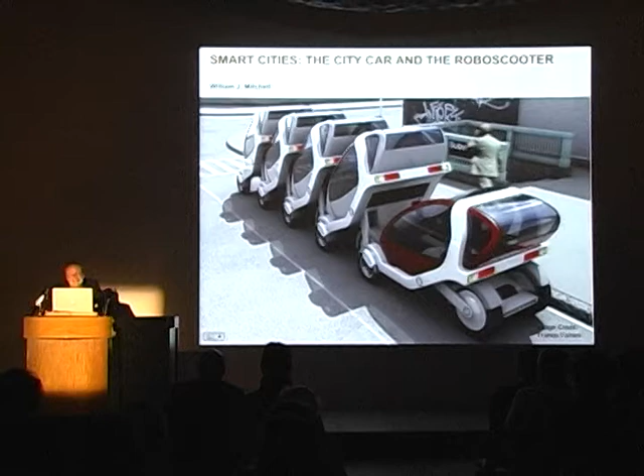I'm going to talk to you this evening about the recent work that we've been doing in my group at the MIT Media Lab. The Smart Cities group is a cross-disciplinary group that deals with really design problems that don't fit within the traditional disciplinary boundaries.

Roughly, they're architectural problems, I think. My roots absolutely are as an architect, but they cut across the boundaries of urban design, of software, of digital networking, and the various other kinds of technologies that I'll talk a little bit about as we go through this evening. We've been doing a variety of different projects, all of which have fairly high technology content.

I was quite thrilled this week. Time magazine put out their list of 50 inventions of the year, and two of them are ones that came out of my lab. I'll talk about one of them this evening, the CityCar project, and another one, the water pavilion, which I won't talk about, but you can take a look in the magazine and check that one out.

So the general direction we've been pursuing is to attack really what I take to be fundamental architectural and urban design and social problems using a repertoire of technologies that's perhaps not the usual repertoire of technologies. So the two projects I'll talk about this evening are the CityCar project, which is a project we've been doing in collaboration with General Motors for the last couple of years, and a project we call the RoboScooter, for a little electric motor scooter that was just introduced at the Milan Auto Show yesterday. So you'll see the first pictures, in fact, of the RoboScooter this evening.

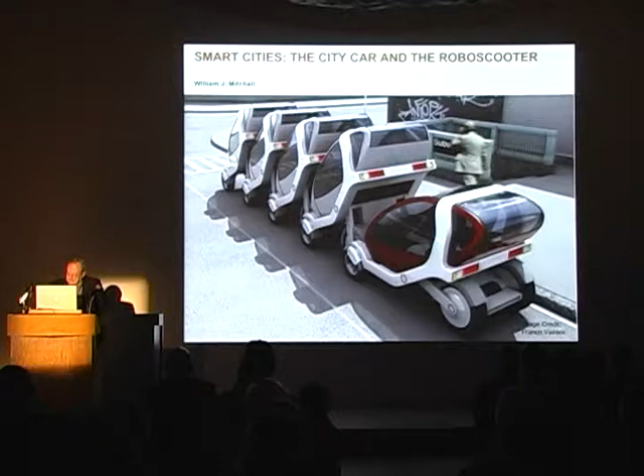And we got rid of all kinds of useless stuff that's in a traditional automobile. We got rid of engines. We got rid of the powertrain. We got rid of steering wheels. We got rid of a whole lot of stuff and reduced the thing back to its essentials as a mobility device, and made something that's very small and very simple and very light. This thing is the size of a smart car when it's unfolded, and when it's folded up it has half the footprint of a smart car. So that's the dimensions of this project, the basic outline of this project.

Let me just show you a couple of slides that suggest why this kind of project is important, why I think it's vital for architects and urban designers to really address this kind of issue in an innovative way. This is the century of the city. It's the century of urbanization. There's kind of a fashion towards the end of the 1990s to think that digital telecommunication and the death of distance that was anticipated at that point would maybe dissolve cities and kind of smear everything across the landscape in a non-urban kind of way. Of course, that never happened. That certainly was never something I expected to happen either.

In fact, we've moved into a century of very, very rapid urbanization. And as probably most of you know, in the 21st century, about 90% of population growth is going to be in urban areas. These urban areas of the world already account for more than 50% of the world's population. We reached that point about a year ago. It's going to move up to 60% pretty quickly. Not only will a lot of the population be in cities, but the huge concentration of wealth will be in cities also. Something like 80% of the wealth of the world will be in cities.

And so if you're concerned fundamentally about urban sustainability and sustainability of the globe generally, the pattern of future energy demand that is determined by urban networks is a really fundamental thing to look at. And if you look at this in a bit more detail, you rapidly see that transportation and building operations typically account for something like 60% of total urban energy use. And some of this is incredibly irrational. I looked at some figures a little while back that revealed that in Manhattan, at peak times, something like 40% of total gasoline use is in cars just driving around looking for parking.

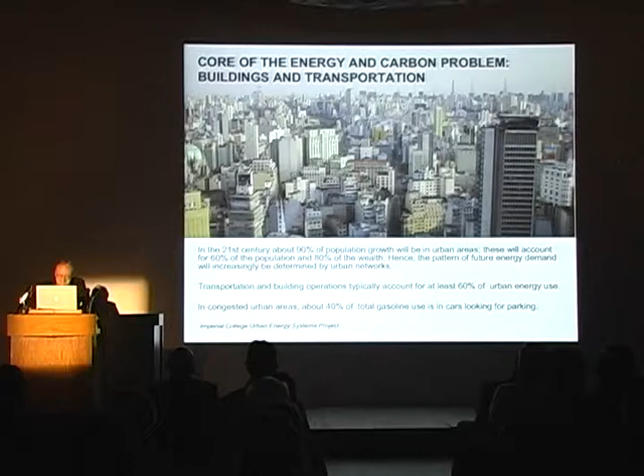Now, this is not rational. There has to be a better way to organize things than this. So this is a major, major issue. How do we deal with it?

Well, I'd like to suggest to you that incremental efficiency gains are not going to get us to where we need to be. Incremental efficiency gains, new gadgets, new fuels, new ways of dealing with things that gain little increments of efficiency are certainly important and worth pursuing, but they're not going to suffice to make a big dent, the sort of big dent that we need in overall urban energy usage.

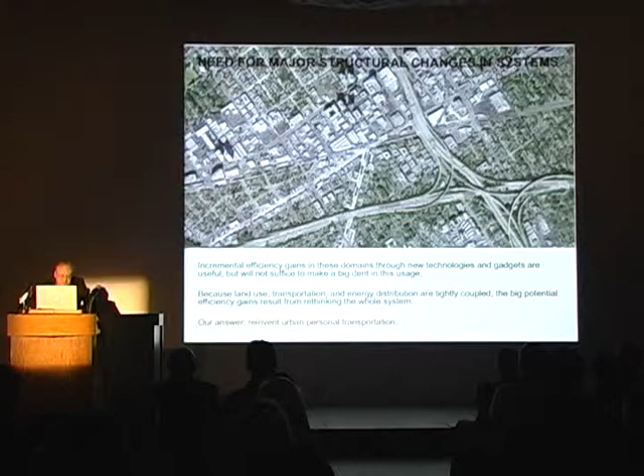Furthermore, as I think most of you realize very well, land use, transportation, and energy distribution systems are very, very tightly coupled. You really can't change one without changing the others. So the big potential efficiency gains result from rethinking the whole system. And that's really what we've been about. We've been looking at ways to fundamentally reinvent urban personal transportation.

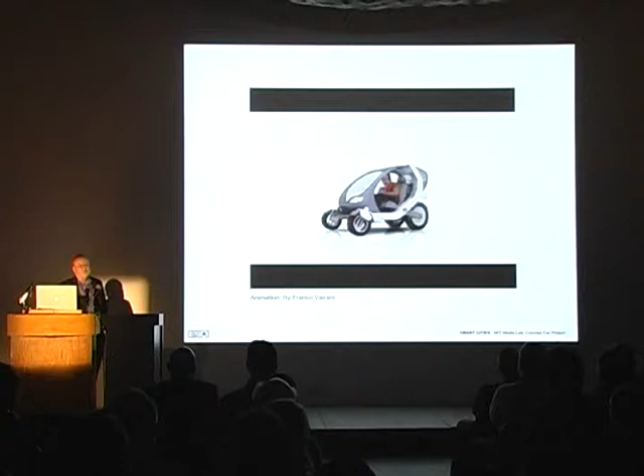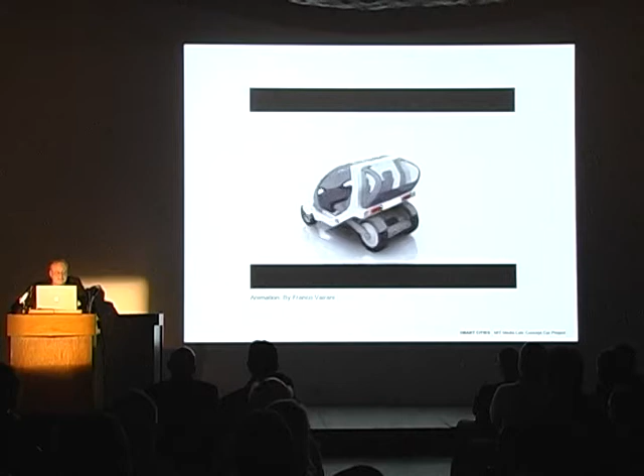This is an early animation we did to show the basic concept of the CityCar. These things do have doors. It was just when we did this, we didn't know what the doors were going to look like, so we didn't put them in. But here we see the basic model of the CityCar. It's a one-way rental system, a one-way shared use rental system. So you pick up a CityCar from a stack, you drive it to wherever you need to drive it, and then you just drop it off.

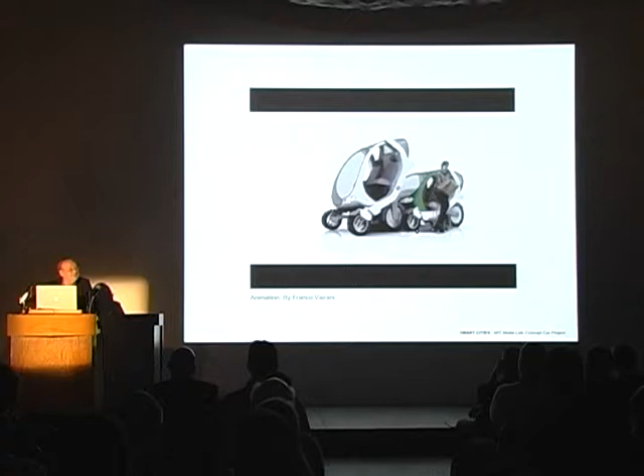The cars recharge while they're in the stack. They're like your electric toothbrush. Through inductive charging, they just automatically recharge. Because they automatically recharge, you never have to plug them in, you never think about filling them with gas. The thing just runs. It automatically sucks up the energy that it needs.

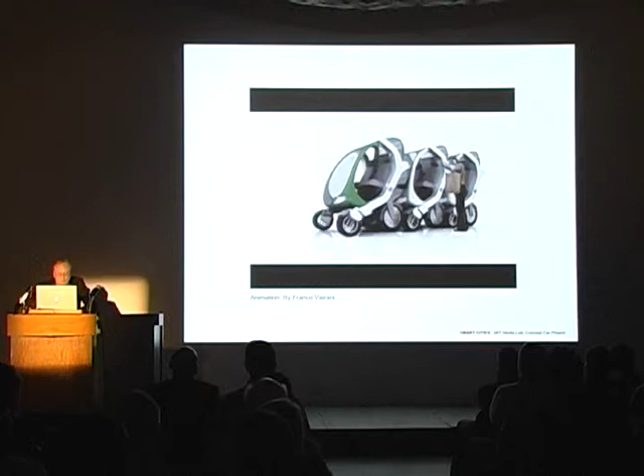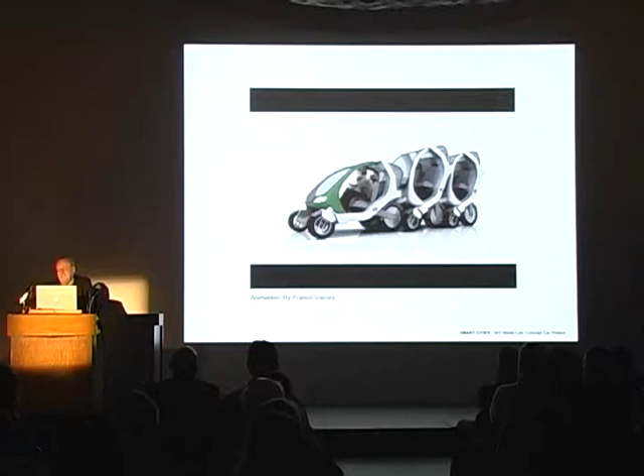And furthermore, because of this one-way rental model, which basically comes down to fairly short trips between charging stations, you don't have to carry around a large number of batteries, and you don't have to give the thing a very long range. So you overcome the fundamental Achilles heel of all pure electric vehicles, the deficiencies in battery technology.

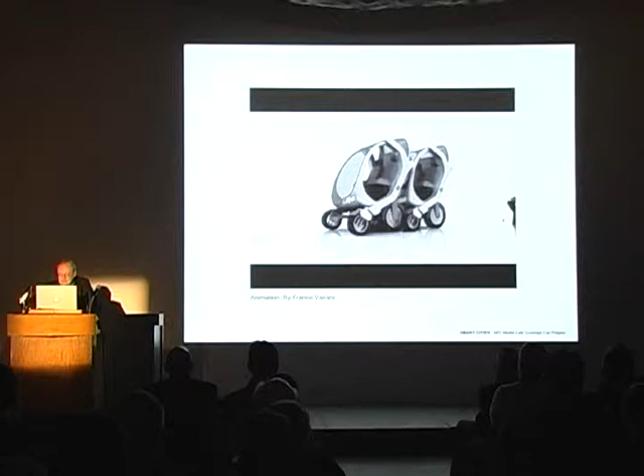So here we see the students just demonstrating how they made the animation, just to make sure you understand these things are not quite real. They weren't anyway at the point we did this. So what are the principles? What are the principles of this thing? Well, as I've said, they're shared use two-passenger electric cars that fold and stack like shopping carts.

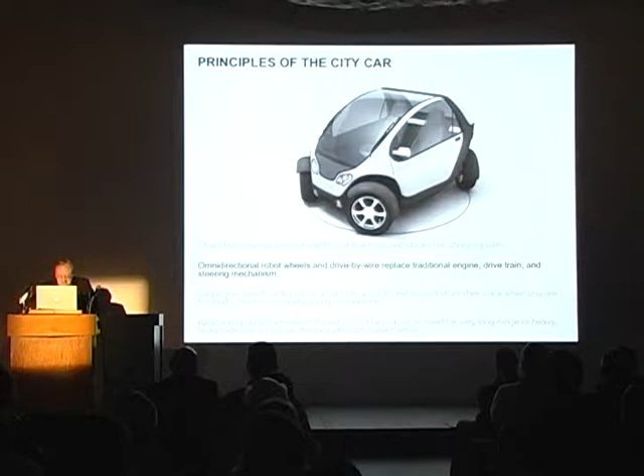They have robot wheels. Basically, we've taken everything of the fundamental mechanics of an automobile and stuffed it all in the wheels. So drive motors in the wheels. This is a very feasible thing to do now. You can get very small, very efficient, high-torque electric motors that will fit very nicely within automobile wheels.

Secondly, we put suspension in the wheels. In-wheel motors don't really work very well unless you put suspension in there too. Otherwise you get lots of unsprung mass and very poor performance, very poor handling. So we put suspension in the wheels. We figured out some ways of getting the suspension in there. Steering is in the wheels, and braking is in the wheels as well.

The wheels have a simple snap-on mechanical connection to the body. It's a little bit like snapping a bayonet mount lens onto a camera body, and it's a simple mechanical connection, and it carries electrical and data as well. It's all drive-by-wire, basically. There's no mechanical connections between the controls and the wheels, just a data cable and a signal going in.

And these wheels spin at 180 degrees, so you can do all sorts of interesting maneuvers with this thing. They're all independently controlled, so you can do this, for example. You can spin the car on its own axis, so you don't ever have to do U-turns. We do O-turns, as we like to say, instead of U-turns. We just change the alphabet a little.

If you want to parallel park, it's really easy. You just drive up like this and then go in sideways, spin the wheels around and go in sideways. Part of our ambition on this is to eliminate everything that might be difficult on a driving test, to make everything so easy that just anybody can get in the car and drive.

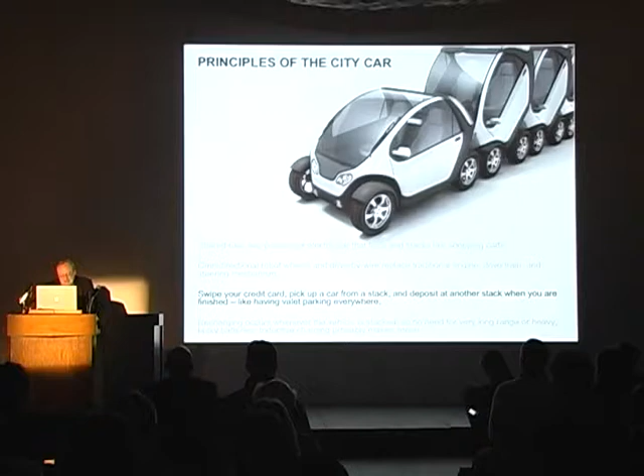The basic model is that you have lots of stacks of these cars around the city. You swipe your credit card, pick up a car from a stack and deposit it in another stack when you're finished. It's like having valet parking everywhere.

Now, everybody used to tell us that this sort of one-way rental model was hopelessly utopian, that it could never work, people wouldn't accept it, that you couldn't figure out all of the technical details. We have an existence proof now that this sort of system does work.

If you have been in Paris in the last few months, you will have seen that 10,000 rental bicycles have been put on the streets in Paris, and they operate on exactly the same kind of system that we've developed here for the CityCar. There are stacks of bicycles all around Paris now. You swipe an access card to unhook a bicycle from a stack. You ride it to wherever you want to get off and just leave it at that stack.

The system is so efficient that it's able to be provided free for the first half hour, which has already motivated all the kids in Paris to figure out ways to drive stack to stack in 29-minute increments across Paris, which is terrific and part of the model.

And the thing really does self-organize. Very, very few bicycles end up in the wrong places. You do a little bit of adjustment of the system to keep the thing tuned properly, but basically it is self-organizing. So this is also a self-organizing one-way system, and it will be very cheap.

And as I've said, recharging occurs whenever the vehicle's stacked, so you don't need long range or heavy bulky batteries, and inductive charging is the way to do this. And we've been doing quite a bit of work recently on the physics of inductive charging and ways to make this work. If you don't know about inductive charging, it's the way your electric toothbrush works, and it's the way that inductive cooking tops work.

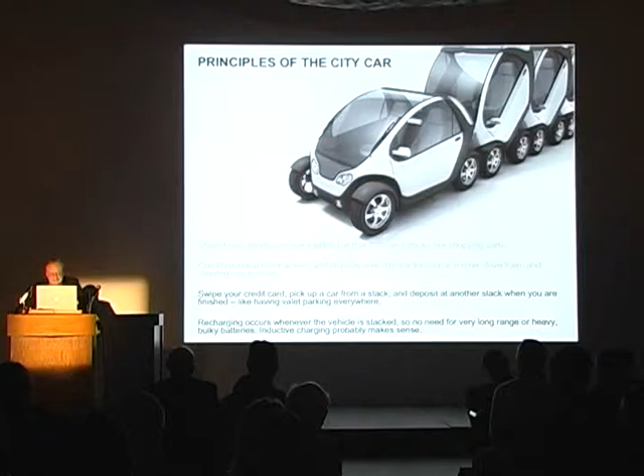So basically you have a couple of coils, and they transfer energy through the air. And then there are a lot of tricks you can perform with these things, with magnetic resonance and all sorts of clever things that I've just begun to figure out recently, and it means that you can do it without vaporizing people, without frying their pacemakers and all of those sorts of unfortunate effects. It really works quite nicely. So the idea is you'd build the inductive charging in the parking spaces.

This kind of vehicle architecture enables us fundamentally to rethink manufacturing. We end up with lightweight, strictly modular construction. You don't need large automobile factories to do this kind of thing. You don't need a lot of robots. You don't need big, complicated assembly lines. Standard interfaces between modules, very much like personal computers. We learned a lot from the personal computer industry. No heavy assembly, snap-together construction, sort of like Lego blocks.

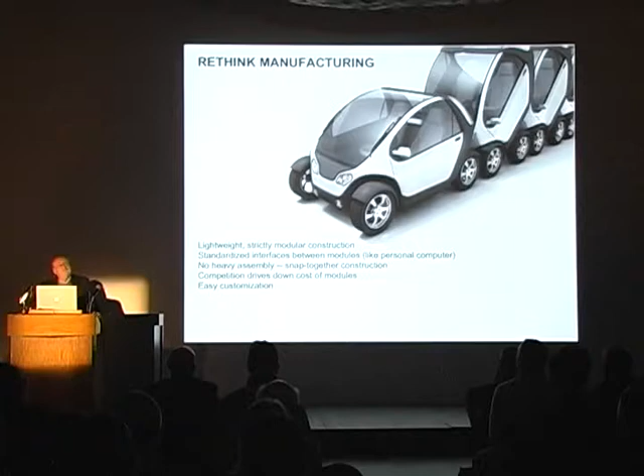And because of the standardized interfaces, we can anticipate that competition will drive down the price of the modules, particularly the wheel modules. So we expect this to be very much like disk drives of personal computers, which are actually very complicated things, but because of competition, they're very, very cheap these days. Over a period of 20 years, the cost has been driven enormously down, and you can easily customize these things. So that's the strategy. Here's one of our early prototypes of the robot wheel.

You might be interested to know that to do this prototype, we used some of the techniques that I've noticed just walking around this evening are very common around here. The basic stuff in here is actually just laser cut wood. Now, when you do a prototype that way, it doesn't last very long, but it's very quick and very cheap, and it's a way to figure out whether the fundamental mechanical principles work or not.

And the other technique that we used here, which is very, very powerful now, is to use eBay as a global parts bin. So if you want any kind of weird part, you just go and look on eBay, and almost certainly you'll find it there, and you just buy it, and somebody ships it to you by Federal Express, and it's great. So there are all sorts of little parts in here that we bought on eBay.

So what you see here is you can see the drive motor in there. You can see the suspension. There's a little suspension spring, which does have enough suspension travel, incidentally, to do what it needs to do. This one has brake discs, as you can see back there. The more recent ones don't have brake discs because we did some work with Ferrari, and working with the Ferrari engineers, we figured out that you can use these motors as very efficient brakes.

So you get rid of the brake discs and get rid of a whole system, and that also fits in with a strategy of using the motors as power generators, the kind of strategy that gets used on hybrid cars, regenerative braking. So this is one of the early prototypes. It works very nicely. It's not by any means as light and simple and elegant as we were aiming for. So we've continued to evolve this technology.

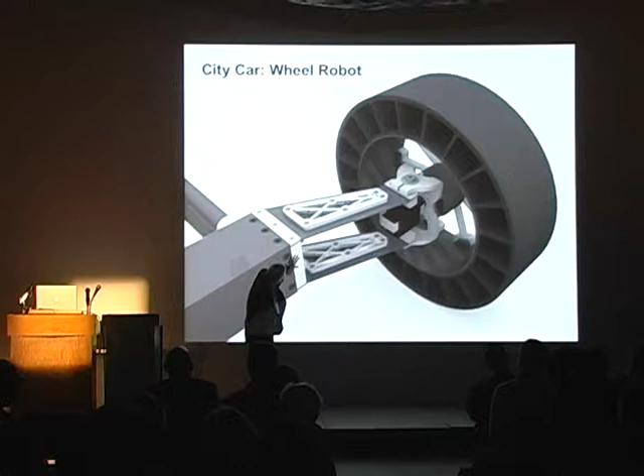You can see that the stuff in the wheel has become a whole lot simpler. We got rid of the brake discs. It's a whole lot simpler and more elegant. And on this one we have an airless tyre as well. So you use a polymer tyre that is organised so that it has the sort of resilience and structural properties that you want. And this attends to one of the ambitions I have for this thing, which is to get rid of all gases and fluids out of this thing. No gasoline, no oil, no water, no brake fluid, none of these things, and to make the whole thing basically a robotic electronic device.

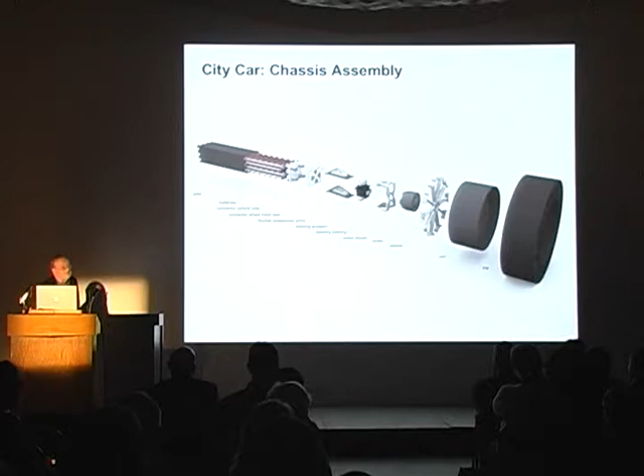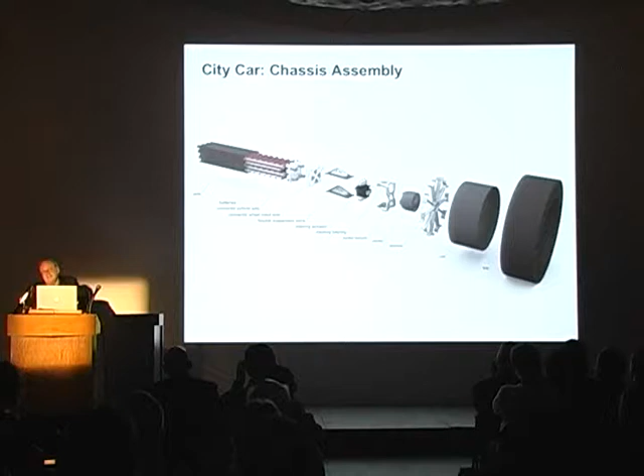So here's how this one goes together. These are just an exploded view showing the pieces. It's actually remarkably simple in the end. And this is one of the principles that we've been looking at, a principle that's introduced in Swatch watches, for example, of trying to make radical simplifications of the system. So you reduce the part count and radically reduce the cost. So these are the pieces. You see the snap-on connection there. And in this case, the batteries go in the axle. So we use A123 batteries, a new kind of battery that are very efficient and have very, very nice properties. And so this is the basic assembly.

Here's a half-scale prototype of this thing. And the thing I want you to notice here is that there's almost nothing there, which is absolutely the point. I mean, a traditional automobile is a very, very complex thing. Lots of parts, lots of stuff, lots of metal. This is almost nothing. So we have the 4 independent robot wheels, which provide drive, steering, suspension, everything you want. The batteries are in the axle there. And here's the digital control system. It's entirely digital and relatively simple circuitry to drive the thing.

Not so simple software, I should say, because you've got 4 independent wheels that can all steer independently and can all have independent speeds and independent amount of power going to them and so on. So very interesting control system problem and very, very interesting thing to design for the kind of maneuverability properties you want. A couple of other consequences of this strategy are that most of the driving characteristics of the vehicle are embodied in software rather than hardware. This means you can download them like ringtones on a cell phone.

So if you're a 17-year-old with a death wish, you can make it perform like a sports car. If you're my 90-year-old mother who has slow reaction times and wants to drive very stably to the supermarket whenever she wants, then it can adjust to her driving characteristics. So this is a very, very important piece of design freedom that you get by replacing hardware with software. I think this is a very important general principle, incidentally. Also, software weighs nothing, whereas hardware always weighs something, so you get great weight advantages by replacing hardware with software.

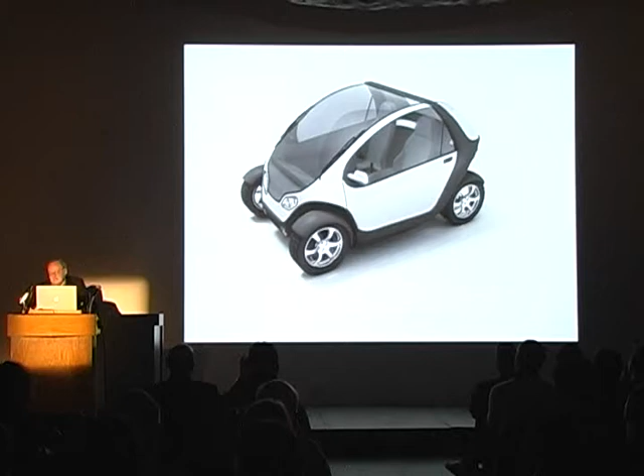So the wheels, the folding chassis, and you can just see how it snaps together in modular fashion. And this is another version. We have many versions of this thing, but this is another version of the automobile. All right, so what do we get out of making a vehicle like this? Well, we get 3 kinds of energy and sustainability efficiencies, and I'm going to take them one by one and explain them to you, beginning with the most obvious one, probably the least important one, and then moving on to some less obvious ones that I think are probably more important.

So the obvious one, I'll call the first order efficiencies, very tiny footprint. As I said before, size of a smart car when it's extended, half the size of a smart car when it's folded, and with the headroom and legroom of a 3 Series BMW, and because we get rid of a lot of stuff, we can do this. Much more agile than a traditional car, so it makes much more efficient use of urban infrastructure.

Secondly, it does all of the things that you want from a benign urban vehicle. It's lightweight, it's all electric, it's digitally controlled, it's almost silent, and there are absolutely no tailpipe emissions. And the shared use principle does something very interesting for you. It enables very high utilization rate.

Traditional automobiles spend about 80% of their time parked, completely useless, burning up space, burning up embodied energy, costing you money. You just have to step out into the parking lot outside here to see what I mean. It's doing absolutely nothing except consuming resources. If you move to a shared use principle, you're able to flip it around and you get about an 80% utilization rate. In other words, the cars are in use about 80% of the time. So you get the same amount of mobility in cities with far fewer vehicles on the road. So this is a very important plus if you want to reduce urban congestion.

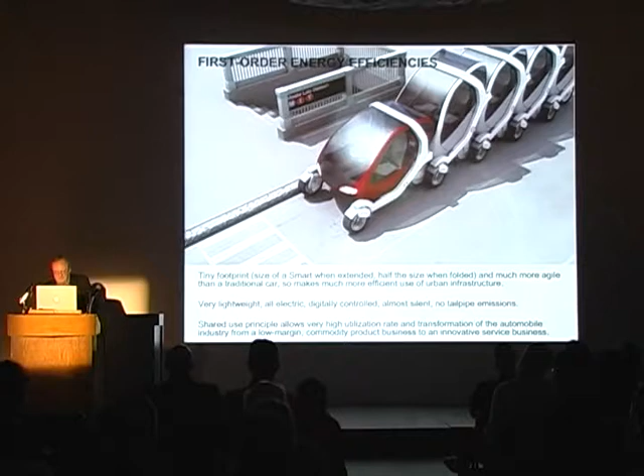So these are the first order energy efficiencies, essentially much smaller cars, much more benign cars, far fewer of them on the road in order to provide the sort of personal mobility that we want to have in cities.

If you were foolish enough to stack as many of our cars as you possibly could around a block, you'd get more than 500 cars around the block. So you get a compression ratio of something like 6 to 1, more than 6 to 1 here. This is enough, as the urban designers here will recognize, to fundamentally change the basic relationship in a city between the space that's devoted to automobiles and the space that's devoted to productive and humane human occupancy. And this is the kind of big win that we're looking for in pursuing this.

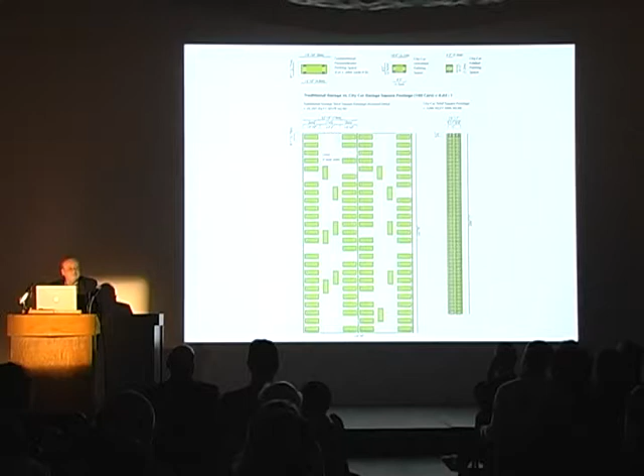And there are some very interesting models for doing these sorts of things. For example, you can put a vertical stack in a parking building, in an apartment building. So it's sort of like a Pez dispenser, so that whenever you come out the front door of your apartment building, there's always an automobile sitting there waiting for you to drive away. And you just drop it back in the other end of the stack when you come back. So you start to see the kinds of models and the way it begins to affect not only overall urban land use, but also opens up some very interesting possibilities for building form.

Let's just take it up to another level. Okay, so that's the first order efficiencies. Second order energy efficiencies are less obvious and probably more significant in the long run. This has to do with the structure of urban energy supply systems. And I pointed out that you really have to think of transportation, land use, and energy supply as all being part of the same system.

So a big problem with electrical systems, with electrical grids, is they have no storage capacity. So this means if you get a spike in power demand, for example, as happens on a really hot day in Los Angeles, the only way to handle that is to have backup capacity power plants somewhere that you then throw online, and having that excess capacity is very expensive. Or else you do brownouts and cut people's service. So neither one of these things is a satisfactory response. So spiking in demand is a major, major problem for power grids.

Now, the other problem with power grids having no storage is it makes them very unfriendly to clean, intermittent power sources like solar and like wind, because the sun doesn't necessarily shine when you want the energy, and the wind doesn't necessarily blow when you want the energy. So unless you have storage capacity somewhere, you have to have backup generation capacity to back up the solar and back up the wind and so on, and that makes it all extremely expensive and uneconomical.

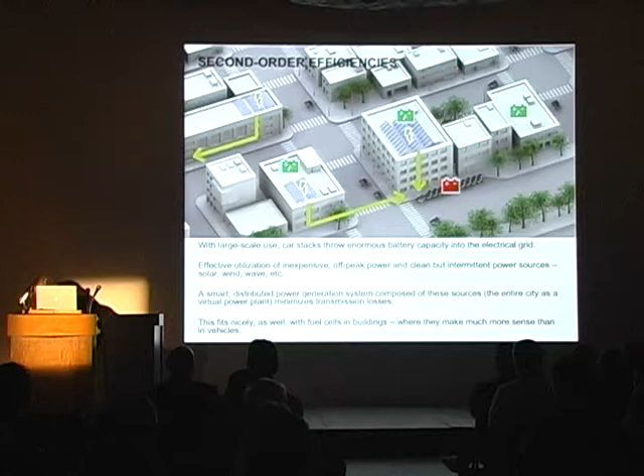You just dropped a water bottle, sorry.

Then you sell electricity back to the grid. So this evens out the power spiking, and it makes the whole thing much, much more friendly to clean, sustainable power sources. Also, it opens up the possibility of really starting to think of a city as a smart distributed power generation system composed of sustainable sources. So it starts to be much more economical to put solar panels on the roofs of buildings, for example. It starts to be much more economical to bring wind power into the system.

And since you're charging these cars in close proximity to where the electricity is actually generated under this kind of system, you minimize transmission losses, which are an enormous problem with the traditional organization of power grids. Also, if you want to use cogeneration plants, if you're interested in fuel cells, all of these kinds of strategies make a lot of sense with this kind of strategy.

And it makes a lot more sense, incidentally, if you're interested in hydrogen fuel cells, for example, to put them in buildings and charge up the automobiles, charge up the batteries, rather than carry the fuel cells around in automobiles. That's a lot of weight. You're basically carrying a big chemical plant around in an automobile, and it's also highly explosive. Doing our calculations on this, we measured the capacity of these things in hand grenades, which we thought was a dramatic unit to illustrate the explosive capacity of this.

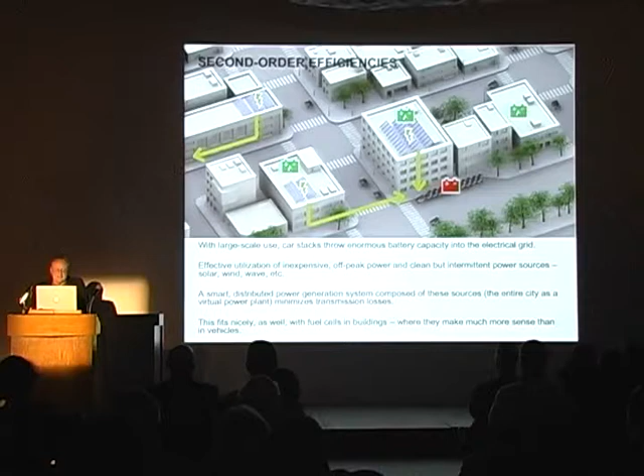So the second order energy efficiency then is to restructure in a fundamental way urban energy systems, and to make sustainable, clean energy a much more attractive proposition. We've done a lot in looking at this kind of thing too, where you start to interconnect different kinds of systems in order to get efficiency. This is actually some work from some colleagues in Imperial College in London. This is not our work, but we're very interested in it, which shows, for example, how you can interconnect the natural gas system, the water system, and the electrical system so that you take maximum advantage of the different kinds of

resource streams. So, for example, a traditional water system has pressure-reducing valves to take the high pressure water that comes from a reservoir and break it down to a pressure that doesn't blow your appliances off the walls and so on. Well, instead of doing that, you put a micro turbine in there and generate electricity out of the reduction of water pressure. And then the gas turbine can run in a cogeneration mode where it generates both heat and electricity, and you can begin to see how you can start to make all of these things fit together in a very powerful way.

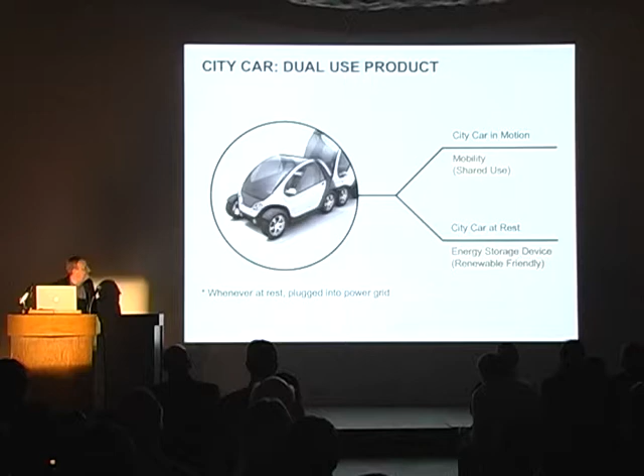So instead of thinking of a city as a collection of different systems superimposed, a water system, electrical system, a gas system, and so on, start thinking of them all interconnected intelligently, forming the intelligent metabolism of a city. All right, this just then illustrates this concept that basically this car is a dual-use device. So when it's in motion, it provides mobility. When it's at rest, it provides the energy storage device that transforms the character of the power grid.

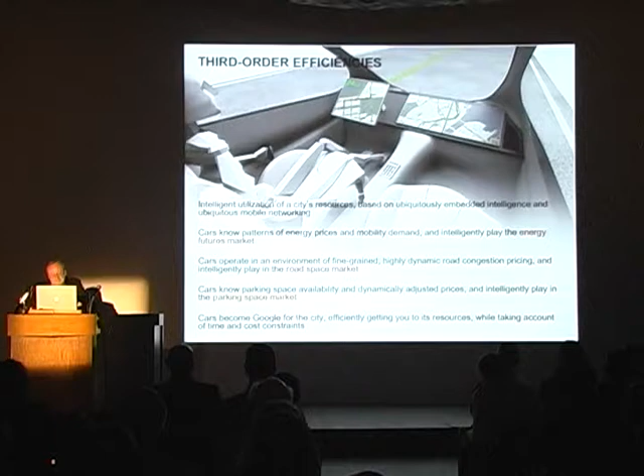All right, the third order efficiencies, and maybe these are the most significant of all. Basically, we think of this device as not simply a device for moving things around, but a device for intelligent utilization of a city's resources based on ubiquitously embedded intelligence and ubiquitous mobile networking. So these vehicles are conceived of from the beginning essentially as networked computers on wheels. We think of the dashboard as being not an interface to the engine, which is a very 19th century idea, but as an interface to the city. And so you end up developing the idea of a map-based interface and a navigational interface in a much more sophisticated way than has been done so far. This is a very crude early conception of this, but you start to get the idea.

And this intelligent access to the city's resources involves the automobile intelligently navigating simultaneously three kinds of markets. So, as I've already described to you, these cars know patterns of energy prices and mobility demand, so they intelligently play the energy futures market. They also play a road space market. So how does this work? Well, the basic idea here is you do traffic congestion monitoring on a block-by-block basis in real time, and that's a very feasible technology these days. You do congestion pricing, and you adjust the prices in real time based on the density of traffic at particular locations. So basically, the more traffic going down a road, the more it's going to cost you to add your automobile to that road.

This idea of congestion pricing is gaining some traction. Singapore has been doing it for a while. London introduced a congestion ring a couple of years ago. Mayor Bloomberg in New York is trying to do this. We're going to see much more of this kind of thing. But what we're proposing here, and we've developed quite a bit of software for this, is something much more sophisticated. So basically, when you set things up this way, your car navigation system is able to do things like take me the quickest way to my destination subject to a price constraint. I don't want to pay more than $10 or something like this. Or the other way around, take me the cheapest way to my destination subject to a time constraint.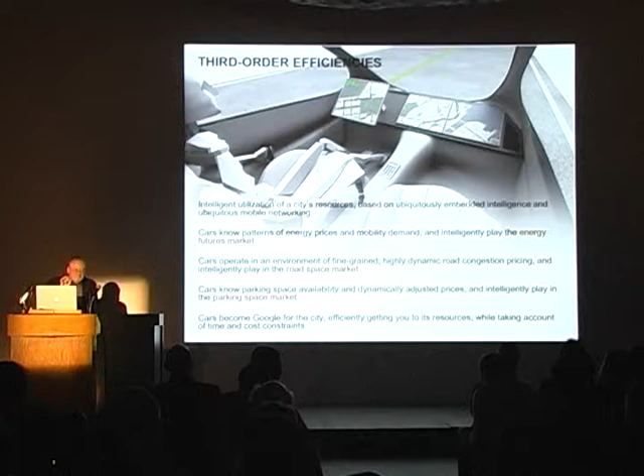So you get a road space market going in which the behavior of these intelligent agents responds to the overall pricing in the system in real time, and the overall pricing in the system responds to the behavior of the agents in real time. So you get a real-time feedback loop going, a classic kind of economic system, and as far as I can tell, though we haven't done all of the math on this, this comes to a very nice equilibrium and beautifully allocates demand to the capacity in the road system. So that's the road space market. A similar thing with parking. Imagine a parking, well, firstly, parking is a terrible market.

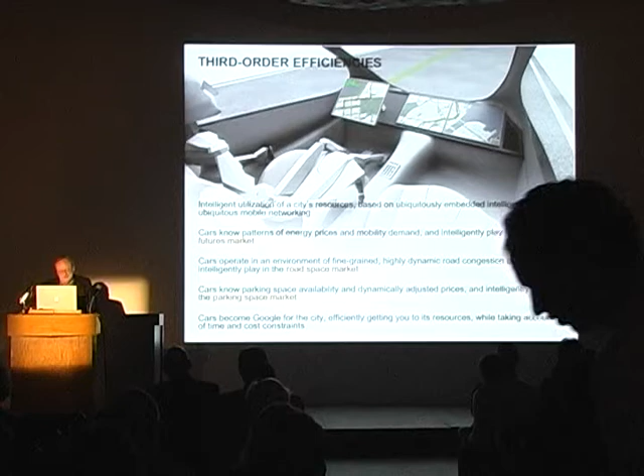Essentially, it has fixed prices, rigid fixed prices, and you connect buyers to sellers by driving around randomly till you find a parking space. So this is really not very good. Furthermore, parking is very, very underpriced in most cities, as my old UCLA colleague Don Shoup, very good economist, has demonstrated. So how do we change this?

Well, put sensors in parking spaces and get the information about parking spaces back to the navigation systems of automobiles, and enable the automobiles to do eBay-style auctions on parking spaces. So basically you can say, look, I'm really desperate right now. I have to find a parking space. I'll pay just about anything. So your car bids high and gets you an expensive but very convenient parking space.

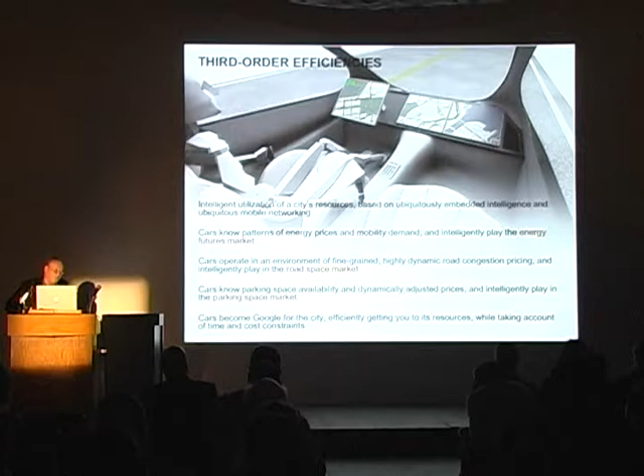Or else you say, I'm a poor student. It's a nice day and I have a little bit of time. I want to save some money. So bid low and probably I'll get a parking space. It's a little bit further away, a little bit less convenient, but it's going to cost me a whole lot less. So essentially these cars become Google for the city, efficiently getting you to the resources of the city while taking account of time and cost constraints.

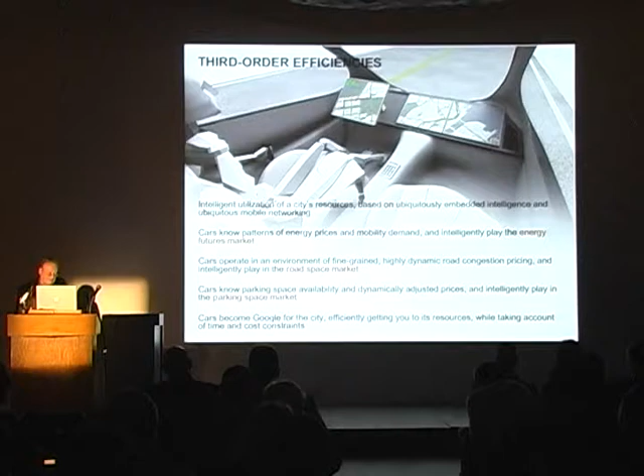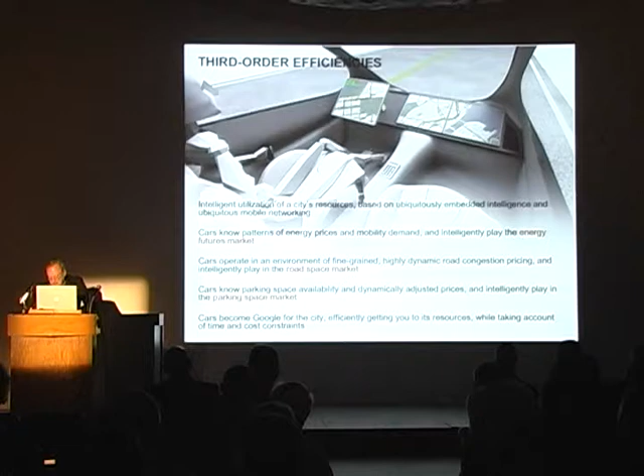So energy cost by playing the energy market, road space by doing the kind of dynamic road space market that I just described, and parking space. So take these third order efficiencies and you end up having a city that works in a much, much more intelligent way. So I just want to show you one more thing about the car, then I'm going to show you another recent project we've done, the RoboScooter project. So there are a number of different ways to organize these systems at an urban scale.

This diagram, by the way, shows the control system of the car. So there is no steering wheel. There's basically a double-sided joystick that you drive like this. It comes up on either side of your seat. And you only need to know three things to drive this car: push to accelerate, pull to brake, and go like this to drive. There are no pedals, there are no other controls, there's no key to stick in, none of this sort of 19th century stuff. It all gets reduced away to something very, very simple indeed.

We built a simulator for this and put it in the MIT Museum and connected it up to an incredibly un-PC video game that involves driving through downtown LA, actually. And it's the most popular exhibit in the MIT Museum. The kids have enormous fun driving this interface. But anyway, the ways in which you can organize these sorts of car systems. So here are some models.

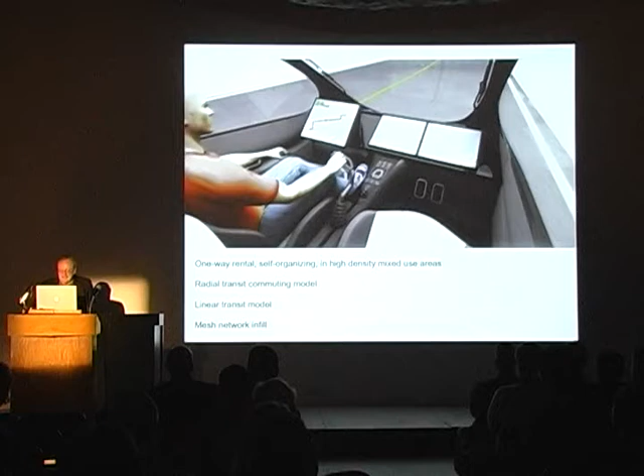So another way to organize these city car systems is to place stacks of these on transit stops, so they solve the last 10-kilometer problem. So the model here would be you come home from work, you pick up a car at the transit stop, you drive it around in the evening, you let it recharge at home overnight, and you bring it back to the transit stop the next morning.

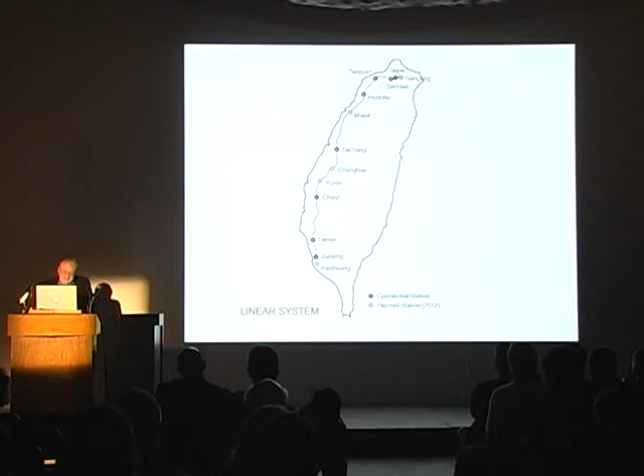Here's another way to do it, a linear system. This is something we've been proposing in Taiwan, and potentially very interesting. So Taiwan just put in a high-speed rail system that goes in completely linear fashion from one end of the island to the other at incredibly high speed.

This thing goes as fast as a Formula One car. So the model here is simply to put city car stacks on the high-speed rail stops, so they deal with the detailed destination problem, the last 10-kilometer problem.

So you might go, for example, if you wanted to take a trip from Kaohsiung down in the south up to Hsinchu up in the north, you'd drive your little city car to the railway station at Kaohsiung, leave it there, blast at very high speed to Hsinchu, and then pick up another one at the Hsinchu station and drive that to your detailed destination, and then drive it back probably to the Hsinchu station when you'd finished with it.

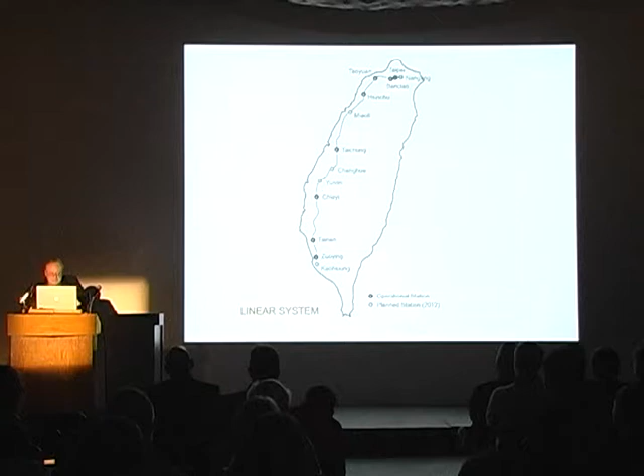This is another electric vehicle we've just done. We did this one for Sanyang Corporation in Taipei, and literally just yesterday we introduced the prototype of this at the Milan Auto Show, the Milan Motorbike Show. So this is very similar principles to the car. It's a folding, stacking vehicle with robot wheels.

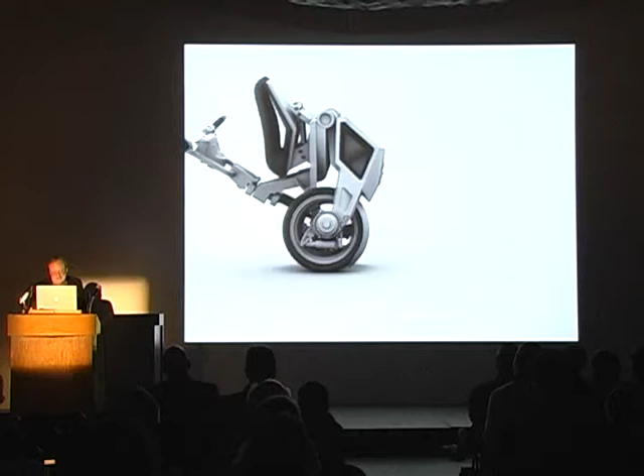It's a two-wheel drive bike, which is very difficult to do with traditional technology. So it has two robot wheels, as you see here, and it folds up. This is a little exercise in transformer design, basically. So that's the way it folds. Whole bunch of patents on the way this folds, by the way.

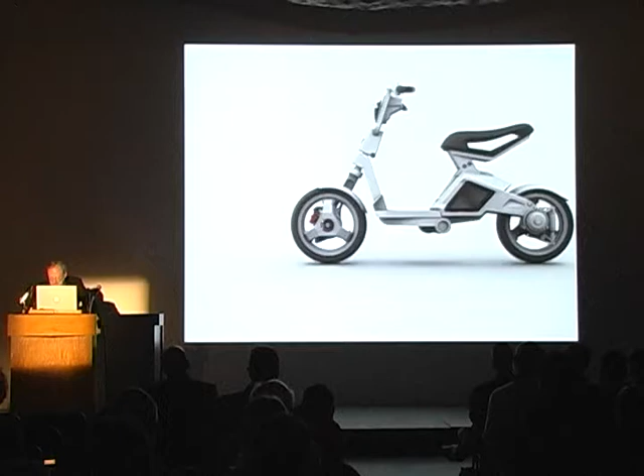The basic model for this is it has bike racks where it recharges in the bike rack, and has a removable battery pack under the seat there. And there are a bunch of other things that I'll describe as we show the actual thing. So these are the final CAD models of the thing. One of the things that I wanted to do was radically simplify motor scooters in order to make them very inexpensive for big Asian cities.

So a traditional motor scooter, a Vespa or something like that, has about 1,500 parts. We were able to get this down to 150 parts, so it's a factor of 10 reduction in the number of parts. We did that in two ways, by using the robot wheel principle. That gives us enormous simplification, and by getting rid of all of the sheet metal and plastic and all of that stuff that sort of messes up traditional scooters.

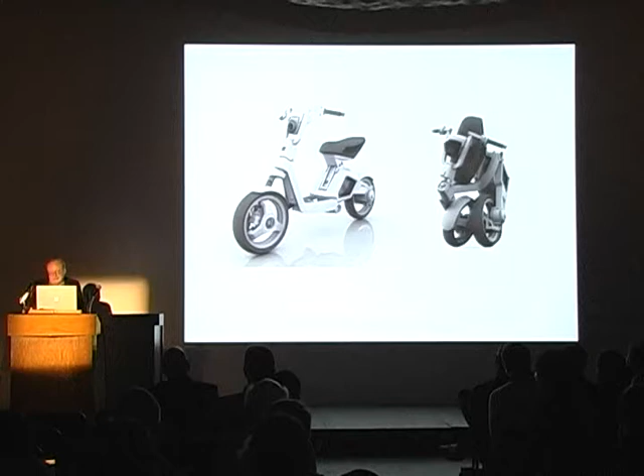And it's a structurally optimized cast aluminum frame, so everything you see here is just the frame exposed, the cast aluminum. And because it's electrical and just has the robot wheels, we were able to get the weight and the complexity way down. This is the actual scooter. This is the finished scooter. You can see a couple of things about it. The two robot wheels here, rear.

It's asymmetrical. The drive motor is on one side here, and on this one the drive motor is on the other side. These little drive motors are terrific now. They're just 3 kilos each motor, and they're tiny, and they drive this thing along very, very fast, frighteningly fast, actually. Asymmetrical forks, as you see here, you don't usually see this on a bike.

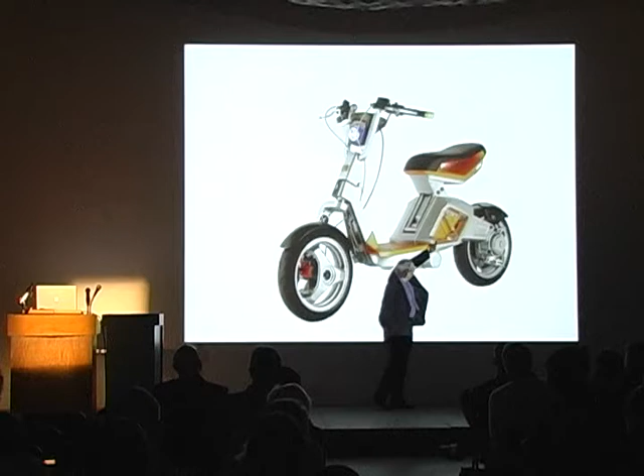The trick with the folding is an inclined pivot, so that it shifts the wheels out of alignment as it folds up, and shifts them back into alignment as it unfolds. Removable battery pack here, which enables you to lease batteries, so you don't have to buy the battery. You can lease the battery. And what else should I say about it? It has LED lights. Has a cantilevered flame seat, which was just something we had fun doing.

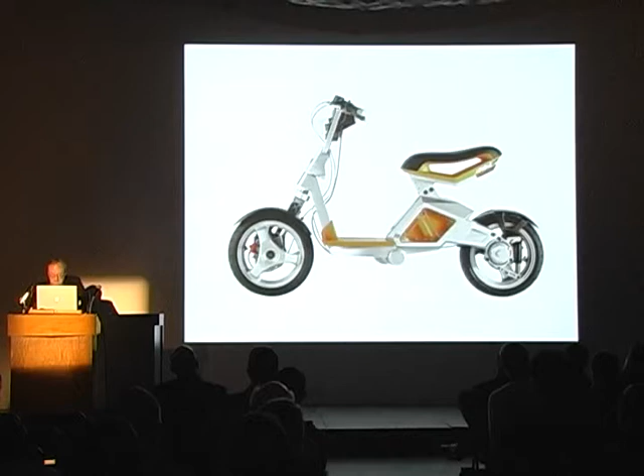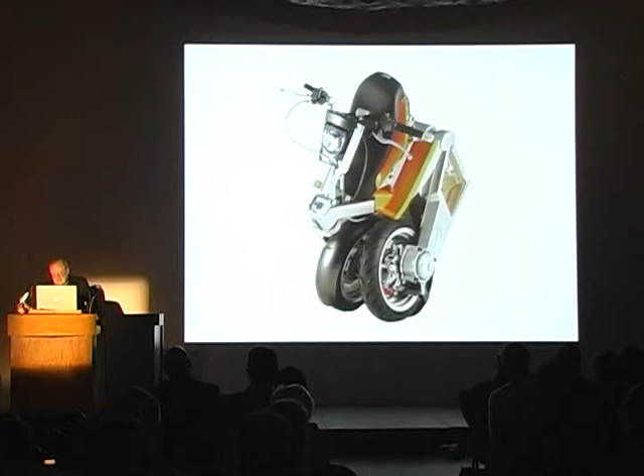This is the thing in profile. There it is. And here you see the folding of the actual one. That really does fold up, as you see. You don't have to wrestle this, obviously. Use the power of the rear wheel to fold it up. You just press a button and it just folds itself up like a transformer, and then it unfolds itself again. We radically simplified the meter.

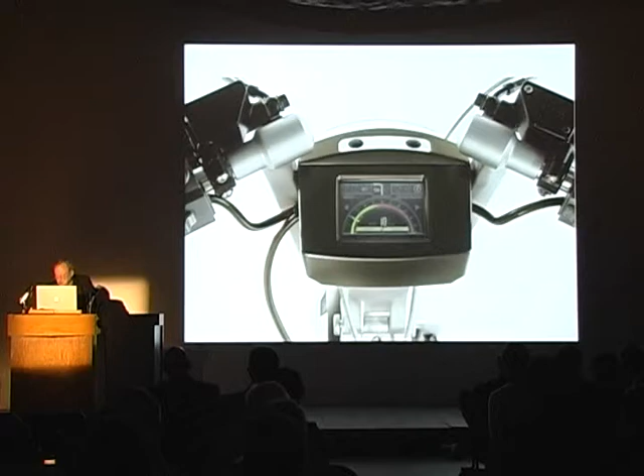So there's just one computer screen that does everything you want, including GPS navigation. This is the removable battery pack. This was a prototype that our collaborators did in orange plastic. The final one is in aluminum. It looks pretty much like this.

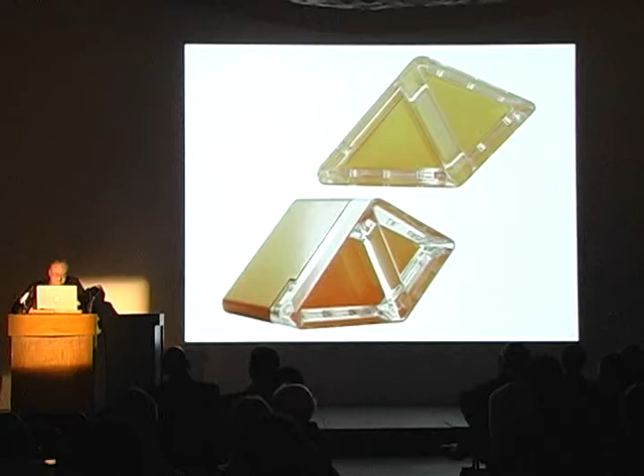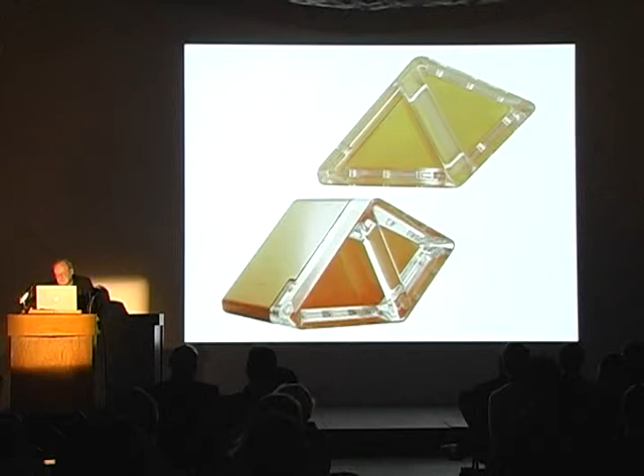It's done in aluminum. So you can just slip these things in and out, and you can buy these batteries in a vending machine, or you lease them from a vending machine. So you take your discharged battery, stick it in the vending machine, which obviously is a charging machine as well. You get credit for the amount of electricity that's left in it, and you just pull out a charged battery. Not having to pay the cost of the battery radically reduces the cost of any kind of electrical vehicle. So leasing these things makes a lot of sense.

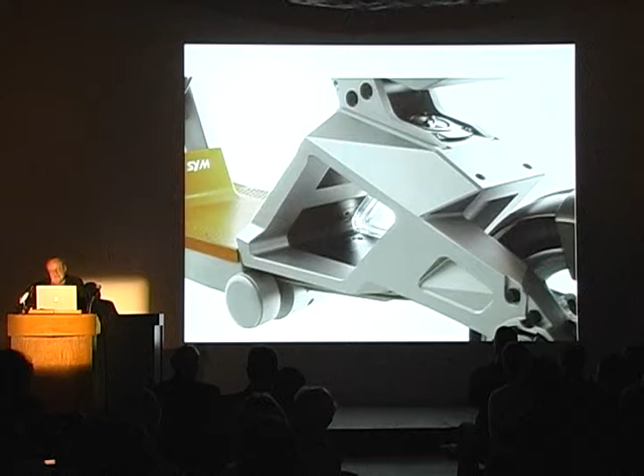This is where the battery slides in. You can see the aluminum frame. We ran a structural optimization software on this, so it really is very literally form follows function to get the structure of this thing. There's the battery pack sliding in and out. The seat, it has the tail light under the seat, which is kind of fun.

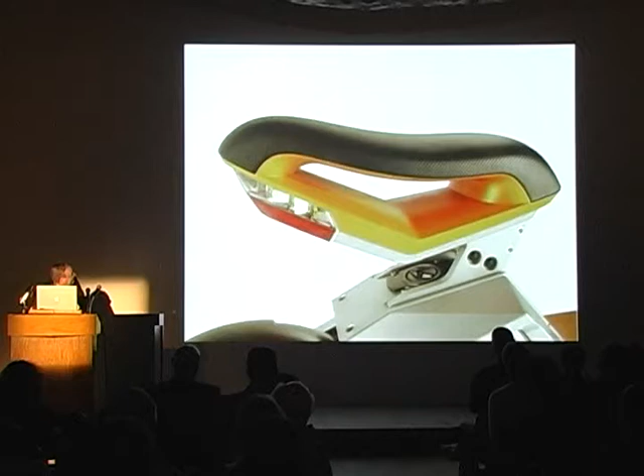When you want mobility, you swipe your credit card. The thing unfolds itself like a transformer out of its rack. You ride it to where you want to go, and wherever you want to go, there's going to be another 7-Eleven within a block or 2, and you just leave it at the other 7-Eleven. So there we see it.

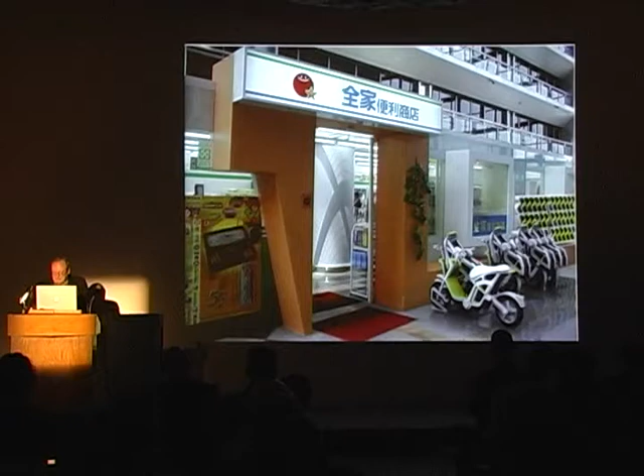This is an earlier version. It's much less elegant and much less light than the final version. But anyway, outside a supermarket and outside the high-speed rail station. And here you see this shows you the battery leasing packs as well. This is like buying bottled water, except you lease a battery out of these things.

And so let me wrap up here. I'll leave you with this somewhat utopian image, but something that summarizes what I've talked about this evening. Rethinking the vehicle, rethinking the way the vehicle uses urban space in a fundamental way, and then rethinking the way this relates to power systems, so you're able to make a city that's a sustainable, smart, distributed power plant.

So these are the sorts of projects we've been working on, and there are a bunch of other ones about to come out that I hope I'll be able to show you next time I'm back. So thank you very much.

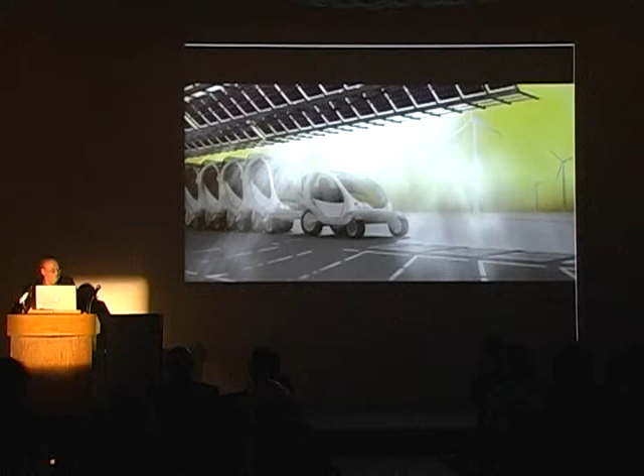Well, basically these scooters, when they're folded up, are half the size of a traditional scooter. So these big dense parking lots either have twice as many scooters or half the size, and we absolutely anticipate that. I mean, as you know, these parking areas are immense. The number of scooters is gigantic. So really fitting them into a small space is a major win. So the big parking lots just filled with these racks, basically, thousands of them.

I'm interested in the software platform that you've devised for the car, and the way in which you're essentially modeling the entire field of transportation of the city in terms of these 3 markets that you've identified. And then each of the cars operates as a kind of intelligent terminal within that network that's both feeding information into the markets and pulling information out from it.